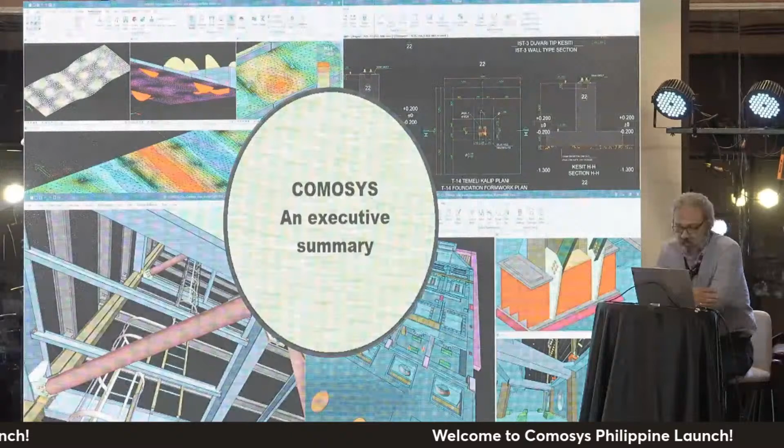So this will be the PowerPoint part where we'll be talking about the executive summary. A brief introduction to the group of companies. You can see a few names out there: Procon, Econ, Proya, Proen, Econut. These are all different companies, but they all belong to the same group of companies. Proya, being in the center, is the software development company which I represent. The others are design and detailing companies, general contracting companies, basically the whole construction industry.

So a little bit of the history. Proya was established in 2001. The finite element module was completed; that was the initial plan. What we wanted to do was basically just develop a finite element module and then link that up with Tekla, create a connection between our finite element module and Tekla. That was the initial plan. Obviously, that went horribly wrong.

In 2007, we developed the steel detailing and shop drawing module. And I would like to share that since 2008, we have stopped using Tekla in-house, because obviously it's our software, we have to use it, we can't develop a software and not use it. But also because the productivity is more; we've learned over the years that we can produce more with the same resources, or produce the same with fewer resources, whichever way you want to look at it.

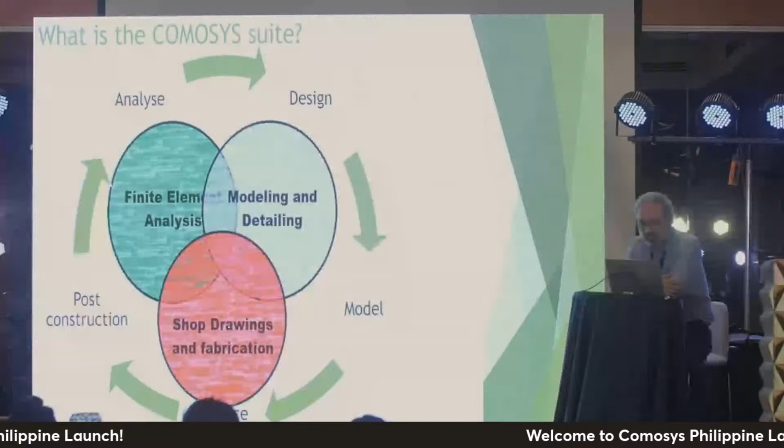Modeling and detailing is also at the heart of the program, as is shop drawing production and fabrication drawings. All three have been put together, which is a unique combination. Normally it's very difficult to get this combination right. Many programs have attempted it, but eventually they've ended up separating the two. There are many reasons, but we feel that we have a good mix, a useful mix.

And the reason I'm saying this is not because it's our software, it's because we also use it. We're not just software sellers, salesmen - we're actually users of the program.

So a few slides. You're familiar with this kind of picture - it will remind you of programs like SAP 2000, right? This kind of picture will remind you of deformed shapes, dynamic analysis, internal forces. This kind of picture will remind you of shell analysis, complicated shells with internal moments and shears and axial forces and stuff like that.

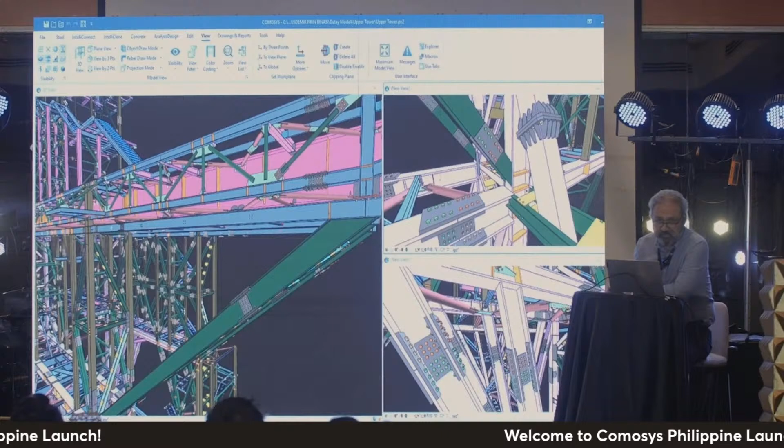So that's familiar to one part of the group. But then there is this - this is a different sector. This is 3D steel detailing, 3D modeling, all the way down to the nuts and the bolts and the cuts and everything there is to it. So this is a whole separate thing.

But in COMOSYS, you will get this all in one package. You won't be moving from one software to another to another to another. If you can do it, it'll be there. If you can't do it, if some feature is missing, obviously we slowly develop more and more features. But the idea is that it's all put together under one umbrella.

You won't be using - and I'll talk about that in a second as well - once you do your analysis, you will be using the same model for 3D modeling. You won't be required to recreate the 3D model.

So more pictures. This will show you some general purpose plate work. And then it's concrete as well - not just limited to steel, it's concrete as well. And not just concrete, but rebar as well.

So just going through the pictures to give you an idea of what kind of software we're looking at here. A few glimpses - I don't want to waste too much time right now, and hopefully get to better parts of the presentation. So that's a glimpse into a drawing produced directly from within COMOSYS.

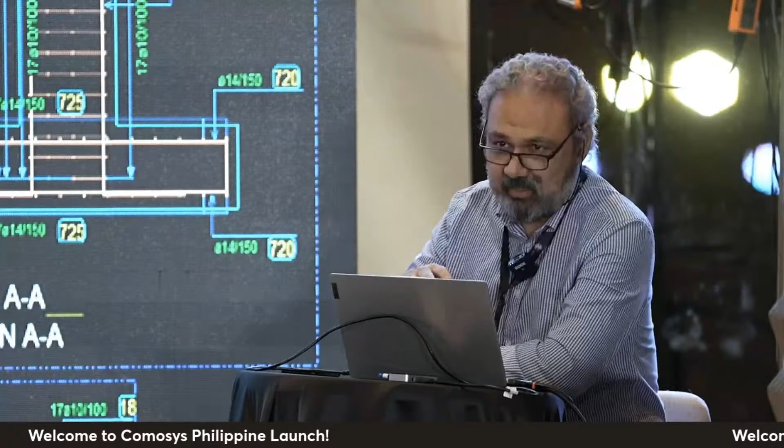You don't need to go to AutoCAD for this, or some other program. All under one umbrella: once you start off, analysis, design, detailing, production of shop drawings, same environment, same program. This is another picture, more familiar to you perhaps since our audience today deals more with steel than concrete, but this is a steel assembly drawing you're seeing on the screen.

I prefer to leave things untouched. I don't try to tweak the drawings so they look good. All automatic drawings can always be made better by hand modification, tweaking, cleanup, which you know much better than me. In fact, I was talking to George and he explained that maybe more than 50% of the time is spent on drawing cleanup and maybe 50% on actual modeling. So being able to get good, clean drawings without or with minimal need of cleanup is extremely important.

It's extremely time saving. So the major core features: it's model based, it's specification driven. You know what model based means. Specification driven means that most things have a specification behind the command. You can change that, you can modify that, and the macros and commands will work according to that specification. So once you set up the specifications, it's like setting up your company and your company styles, and once you've got that, it'll be a smooth ride.

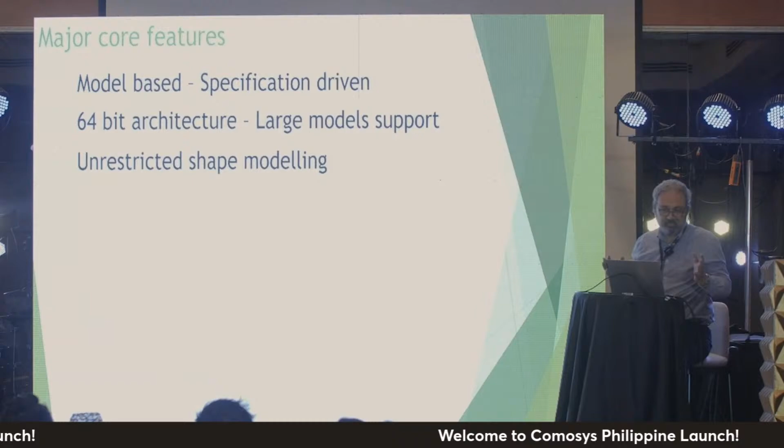Unrestricted shape modeling, we're not restricted to steel frames or anything. You can actually model an aeroplane if you want to. Theoretically, the modeling is pretty general purpose. It's got multi-user support, which means for larger projects, you can have more than one person working on the same model at the same time.

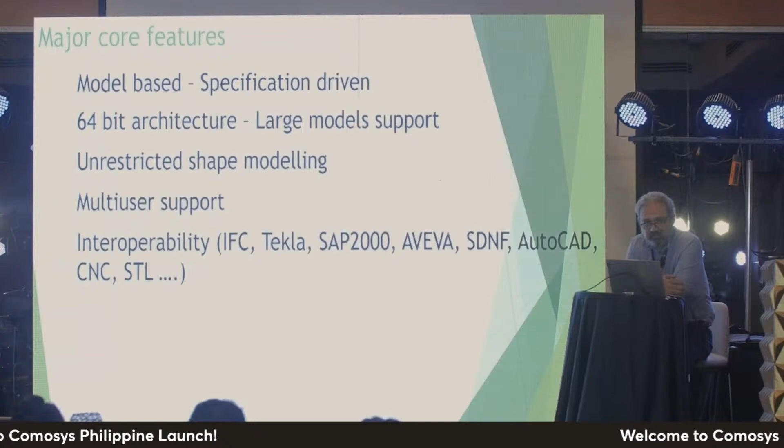It's got lots of interoperability. IFC is the standard, as you know, but knowing that Tekla is the market leader as we speak, we have also developed something like a two-way, bi-directional link from COMOSYS to Tekla and the other way around, in which you don't get just dead objects, but native objects on both sides.

Export to SAP 2000, AVEVA, SDNF, AutoCAD, CNC, the list is long, and it's fully customizable. You can customize the macros, you can customize the defaults of drawings and stuff like that, save them away. And it's also fully programmable, which means that if you have programmers in your team, and they don't need to be very high-end programmers, they can be .NET-based, C#-based programmers, you can develop your own components. You can develop your own entire software if you want, built on top of COMOSYS. So if you are working, for example, in the HVAC industry, and you want to develop an HVAC module, you can do that.

So that's one thing which needs to be mentioned. Now, frequently asked questions: can I do everything I do in other software in COMOSYS as well? The answer is yes. More often than not, I don't want to say always yes. It's never always yes, but 98% of the time, it's yes. So rest assured about that.

Is it faster than other software in modeling? This one I can assure you: once you get your people trained, which I always say is a process of about 2 months, especially for Tekla users who adapt very, very quickly, they will get close to their Tekla modeling speeds in 2 to 2.5 months. In 6 to 12 months they will hopefully have reached the best speeds, which in my personal experience—and we collect statistics on these things a lot—would mean at least double the speed of your existing possibilities.

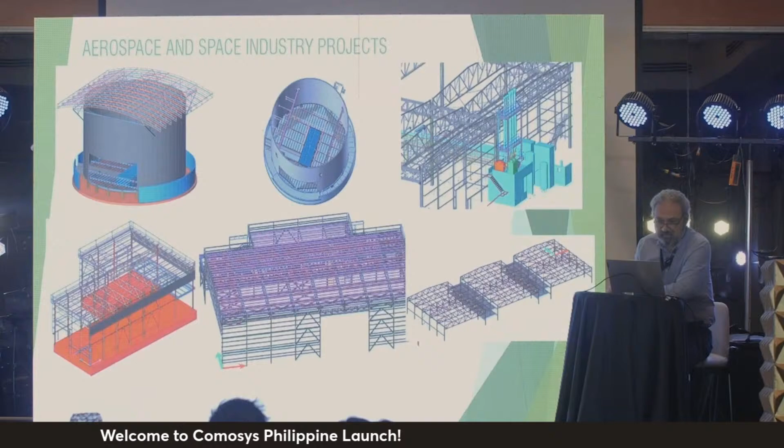Miscellaneous industrial plants, defense industry, aviation projects, aerospace industry, and last but not least, we're so confident that we even built and analyzed our own headquarters. So the Pro headquarters today was also designed entirely by COMOSYS.

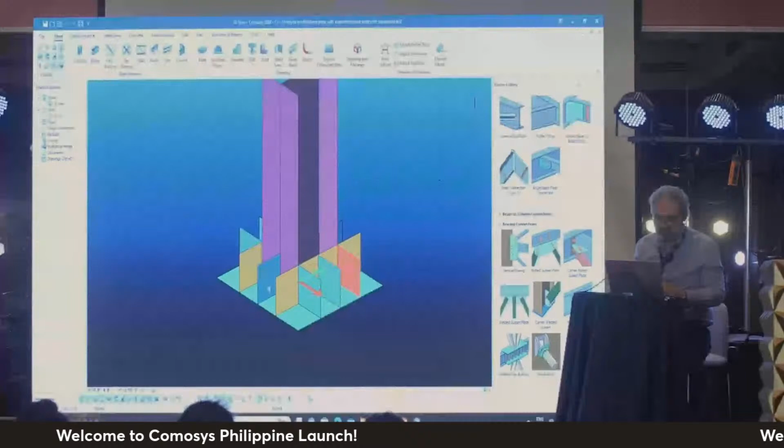Super shells are shells, but super shells, right? You know what shells are, shell analysis - this is a shell, this is a shell, this is a shell. But actually this is not a shell, this is a super shell - a shell which will get meshed automatically.

So think of it like a column and a base plate that you've modeled like that, with some stiffeners and everything. When you go to the analysis and say mesh automatically, you see it immediately meshes it, and it meshes it knowing the connectivity. Can you see the mesh - this plate is aware of this plate, and this plate is aware of that column flange, right?

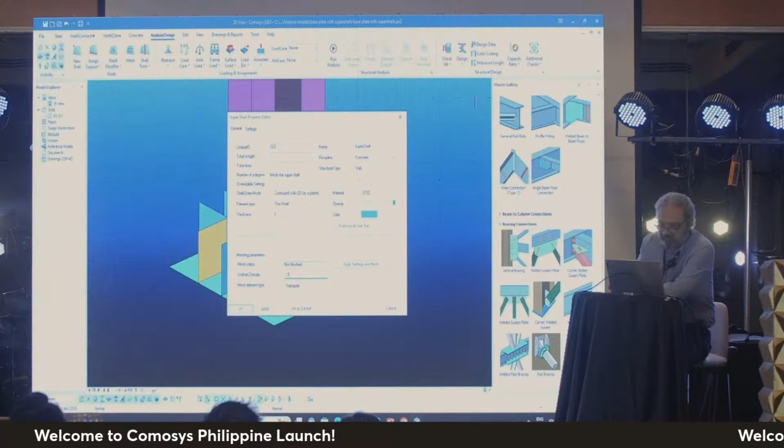So just by the press of a button, you can create these automatic meshes, and you can load them as well. If you look at the mesh parameters - let me remove the mesh - right now it's an average size of 50 millimeters. What if I want a denser mesh for this stiffener? If I click on this and say I want a 10 millimeter mesh for this, and 50 for everything else.

So a 10 millimeter mesh for this plate - but how will it connect with the neighbors? It needs to connect wherever there is contact. If I say mesh it again, just look what happens - the 10 hits the wall and turns the wall into 10 as well. But then slowly as you move away from that contact point, it comes back to 10, back to 50. So automatically you see that it's adaptive.

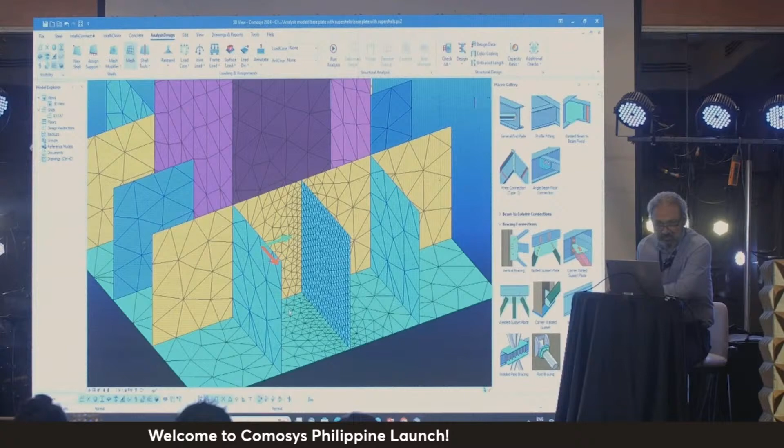I can make a hole here and the mesh will auto-generate. I can add additional plates and make it very complicated. Let me show you a more complicated one - this is like a steel silo bunker with many more plates than the other one, as you can see on the screen.

And it is unmeshed. These plates are big super shells, and they automatically sense their neighbors. They automatically know that something is touching them.

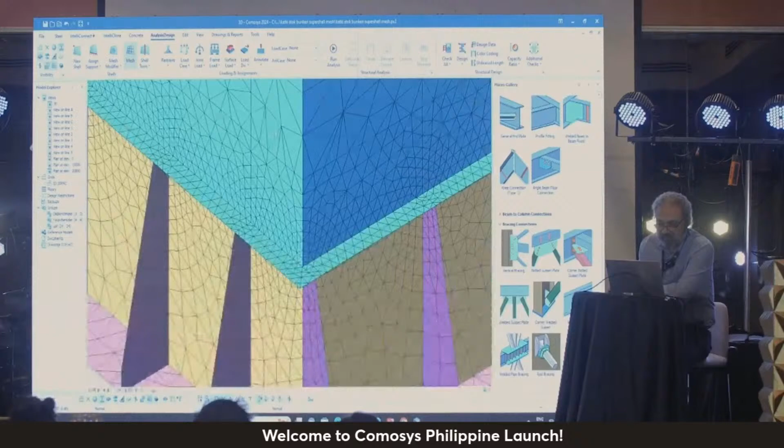So if I were to go to analysis and say go ahead and mesh that, you see how quickly it varies the size of the mesh, and as it touches another plate, there is perfect contact. You can see the exact compatibility of the nodes. People who are into analysis and design will appreciate that more.

But this is extremely useful if you're an analysis and design company. Like I said, there are hundreds of features, so I'll just be skipping over most of them. This is something interesting, the loading, but we won't have time to talk about that. Let's move on to something you will like.

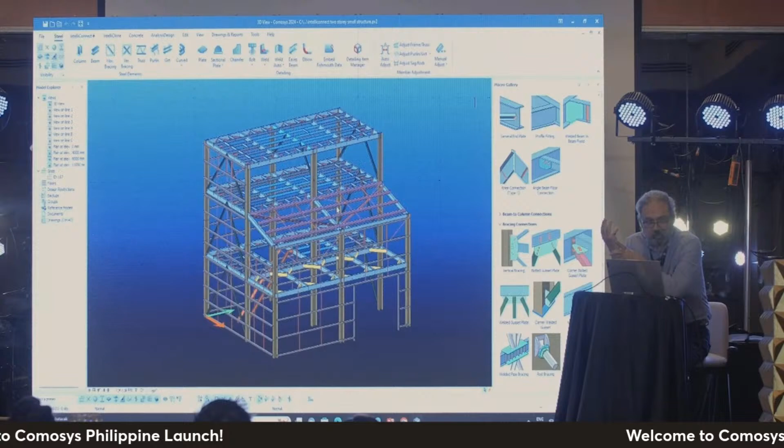It's about detailing now. We have a feature which is not available in any other software, and this feature we call IntelliConnect. The reason I say it's not available elsewhere is because we do have something which sounds similar, which is AutoConnect or rule-based joints in other software.

What do I mean by rule-based joints? I mean that you define the rules, and the program automatically selects from the library whenever it finds that situation and connects for you. That's what a rule-based joint is.

That's what AutoConnect does. But the thing about AutoConnect is that it's a one-by-one connection. One element is connected to another element, one element is connected to another element, and for each one, you define a rule.

For example, you will define a rule saying that when a beam comes from the flange side of the column, use this connection. When a beam comes from the web side of the column, use this connection. When a brace comes from the side of the column, use this connection. But what happens in real life?

What happens in real life is something like this. For example, here we have a complicated situation in which there's a column. There's a beam coming from the flange side—this is a fixed connection. There's a beam coming from the web side—this is a simple connection. And there's also a brace coming into that same point.

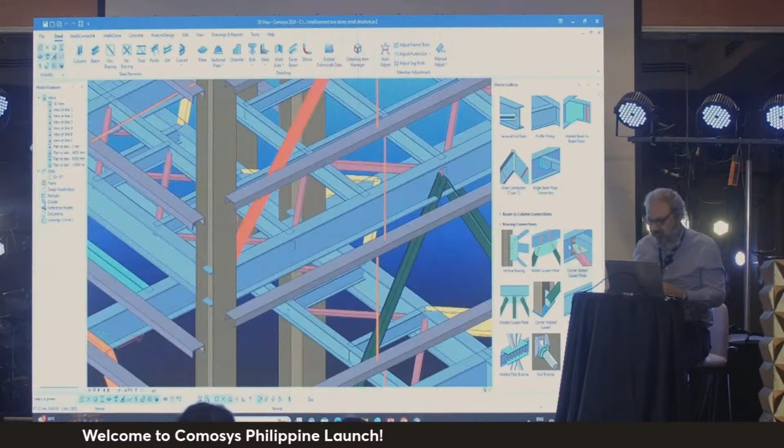Now we might set up our rules saying that whenever you see a beam like that, use the haunch connection. Whenever you see a beam like that, use the stiffened end plate connection. Or whenever a brace comes in, use the bolted gusset connection. But what happens in real life when we do that? I'll show you exactly what happens.

So what happens is the program will come in and connect the haunch—that's the first rule. Then the program will go to your beam-to-beam and beam-to-column connections and say, okay, this one and this one, right-click. Then it will come to your bolted gusset connection and say, okay, this one, right-click. And this is what you get in real life using AutoConnect.

Something you just can't use, because all three connections were unaware of each other. The haunch was unaware of the stiffened end plate connection. The stiffened end plate connection was unaware of the haunch. Both were unaware of the bracing. They were just connecting. So can you use this as it is?

No. You need to either delete it or go inside each of the macros and spend time there. This is what we attempted with IntelliConnect—to find a way to make the program aware of everything happening at that point, everything that can possibly happen there. If the macros can talk to each other, and find solutions where they can squeeze in without clashing, or move around a bit, those are the kinds of things I'm talking about. If we can do that, then maybe not AutoConnect, but IntelliConnect can help us find a solution for this.

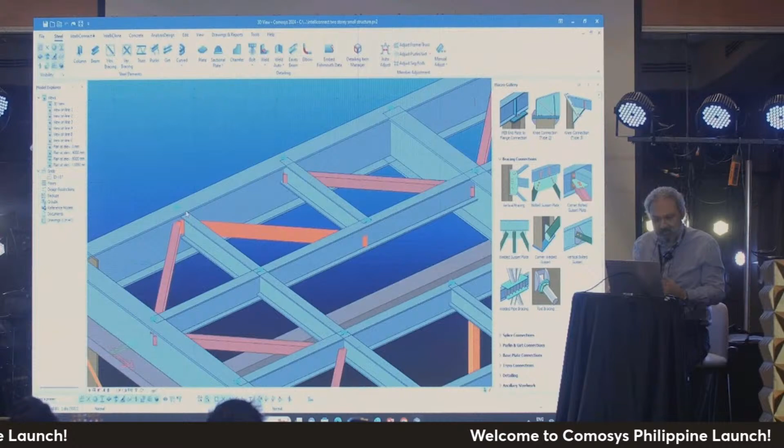But it also does simple things. For example, if I were to just move away - by the way, what is that technology which helps us find the zone? How can we define which elements are involved? For that, we have this special feature called the finite element node, which has all the connectivity information at that point.

This little blue node you see on the screen - if I double click it, you see something called the connectivity of 4. It knows there are 4 elements coming in there: one is the continuous beam, one is the secondary beam, and there's a bracing and another bracing. So it knows the connectivity, and because it knows the connectivity, it also knows what those profiles are and how big a connection will be created. Theoretically, it has the information, and the challenge is to use this information to find a viable solution.

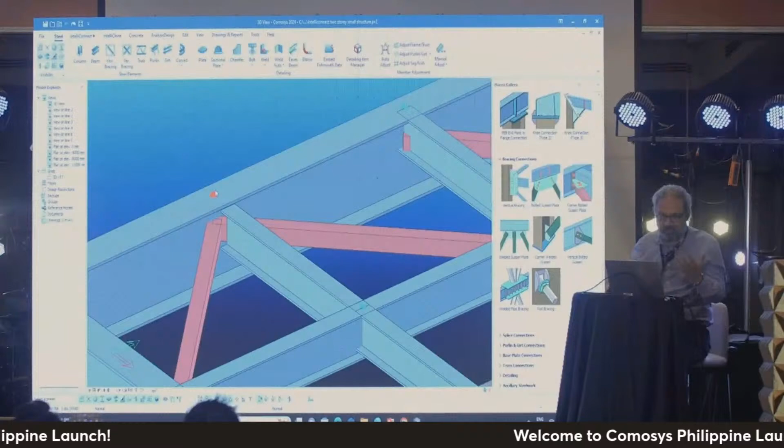So how does it work? It works basically by selecting a node and calling IntelliConnect. You select a node and say, hey IntelliConnect, can you do something about this, given my rules? I have a set of rules in the background, but let me do the simple cases for you first.

I'm going to select the whole building, and I've also selected the nodes - those little blue nodes you just saw. I've selected everything basically, I don't need to just select the nodes, I can select everything. I right click, go to my IntelliConnect menu, and say create the girt connections.

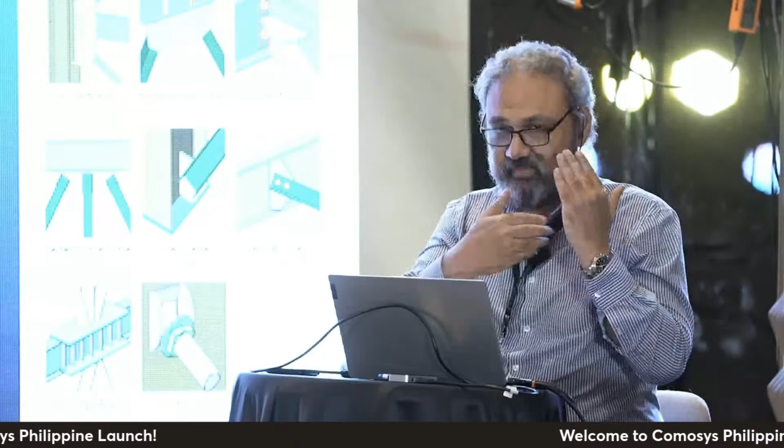Now just imagine what I'm saying over here: go through this entire model, find the girts. If they're one-sided, find them. If they're two-sided from both sides of the column - the column can have 2 girts coming in, or they can have a single girt - find them all, wherever they are situated.

I say click create girt connections, and it says okay, I can give you these 4 options. What kind of a girt connection do you want? I go with the bracket type without cut - I happen to like it, you can like something else. We'll talk more about adding more options to this. So let's just say bracket type, this is the girt connection I want.

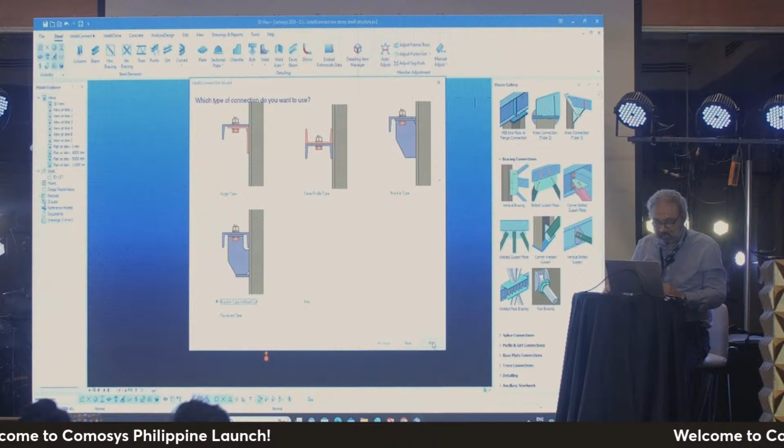Don't forget, I've selected the entire building, and I'm saying just create the girt connections, and I'm going to press run. Now it's looking through the nodes, finding the connectivities, finding the beam groups, and trying to classify where the girts are. Whenever you see 'done' over here, it means it was able to connect. If it's unable to connect, it'll say could not be connected.

And then you can go there and do it yourself manually. But what has it done? Let me close this and zoom in. So it has connected this girt - it's found the girt and connected it.

What about the double-sided ones? It's found the double-sided ones and connected them as a double-sided connection, not as two separate connections - not one connection for this and one for the other. It's a common connection. It's found the ones at the edges, found them all, just by selecting the nodes. It's classified them into one-sided connections, two-sided connections, and gone ahead and done the detailing.

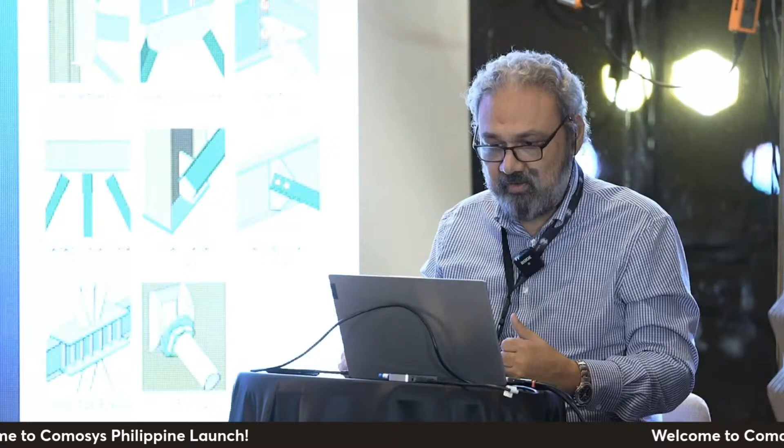What if I selected the whole thing again, right-clicked, and said IntelliConnect, create purlin connections? It gives me certain options - do you want the angle type, for example, or the folded plate type? Let's go with the angle type, and I want to reverse the cleat so it's on the other side.

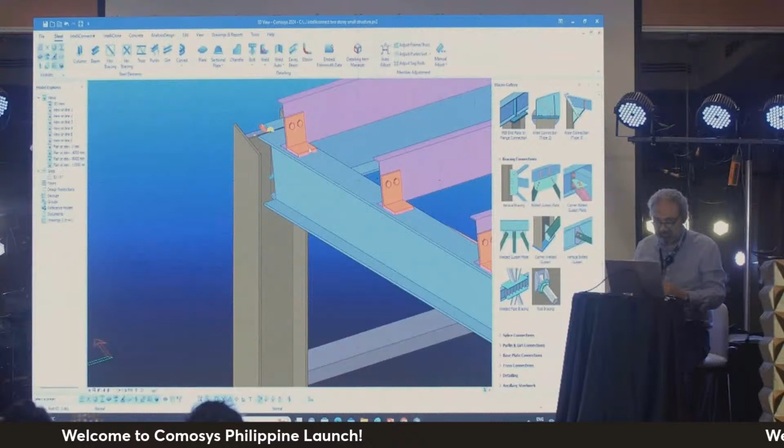I just say okay, please find all - I've selected the entire building - just go and find all the connections where purlins are doable. It gives me a report at the end, I can close that, and my purlins are connected. Just imagine what I'm doing over here - these are the easier cases.

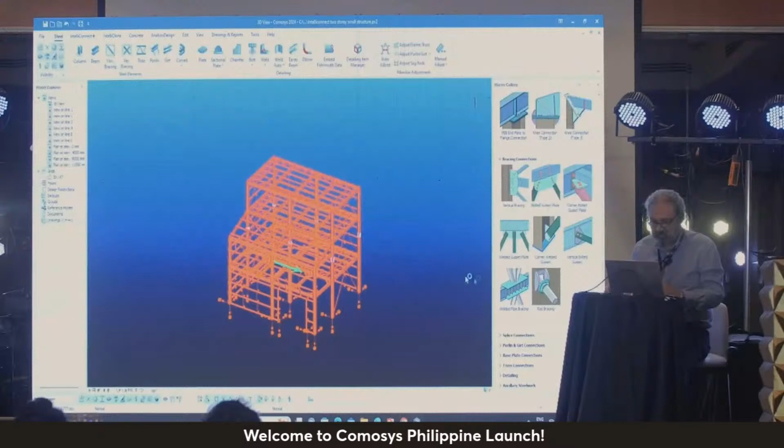I'll get to the harder cases in a minute, but imagine the power which it can bring to you. Let me select everything, right-click, IntelliConnect, and say create the splice connections. Now, splice connections have to be between elements which are parallel to each other - this is not a splice connection, this is a splice connection. When I do that, it goes inside and finds 6 places where there were splices in the model.

And very conveniently, it goes through the entire model. Now, it looks a bit like magic, but it's actually not magic, obviously. There's a lot of programming involved in this. There's a lot of intelligence involved in this.

What about these sag rods? These sag rods need little holes over here for the sag rod to go through, right? Over here, over here, over here. All these need to be connected. What if I just right-clicked and said IntelliConnect, create my sag rod connections? It'll find the sag rods. It'll find the girts which are connected to them. It won't make a mistake in finding the wrong element. Let me just go ahead.

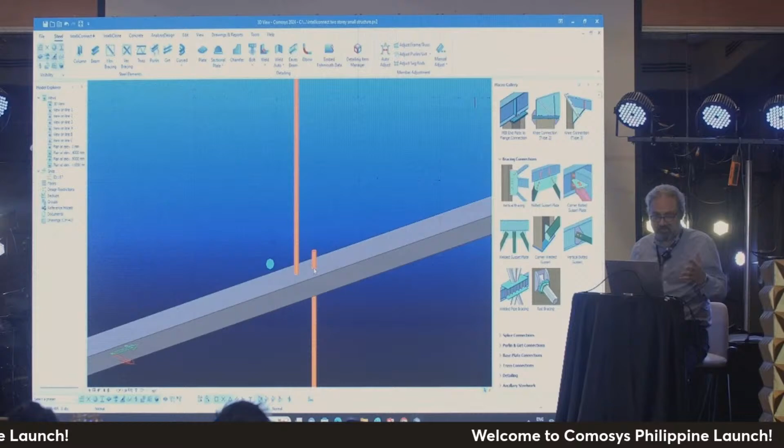Okay, so it's mostly done. And if I zoom in now, can you see the little holes? These weren't there a moment ago. But what it did was, it just went through the entire structure, found the sag rods, found the girts, found the connection points, and did my connection.

Now, up till now, these are comparatively a lot easier. I'll talk about two more cases which are much more difficult to solve. And those cases I'll call the difficult cases. There are many more cases actually, but I don't want to spend too much time on this, just to give you an idea.

These are the floor beams and the beam column, the one I did in the beginning, the column, the beam, this beam, and this horrible mess which we saw over there. I'll do examples of both.

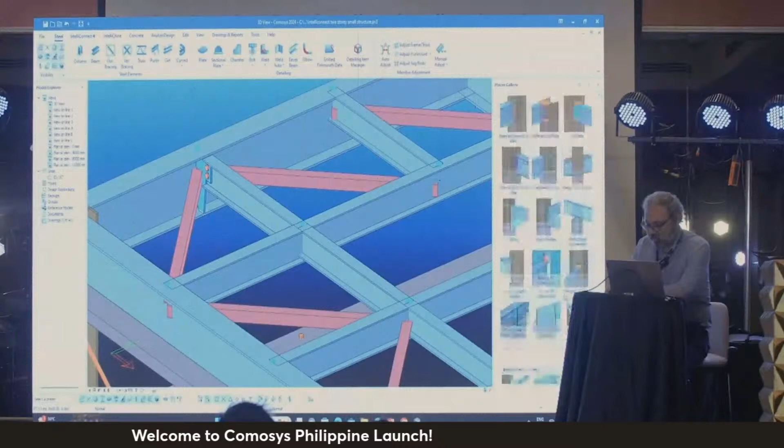So coming to the floor beams, if I have a situation, I'll do it manually for you. Let's say I want to use the fin plate connection over here, and then I want to use the corner bolted gusset connection. So this one and this one with this one, and then this and this and this. I've made a nice connection with the beam connected with the fin plate, and the horizontal braces connected with the corner bolted gusset connection. This is a very common way of connecting, especially when you don't have too big loads.

But what if, let me undo this, what if my requirement was to use the stiffened end plate connection? Now it's impossible to make a connection over there for the bracing, because it's already clashing, as you can see. Now, in actual practice, what do we do? We shift the horizontal braces a bit to the left or a bit to the right. That's what we do—5 centimeters up to 10 centimeters sometimes, depending on the situation.

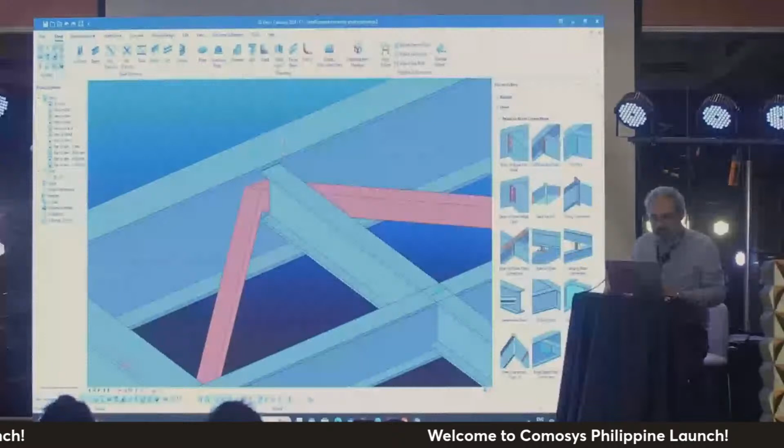Now, that's a complicated decision, which needs to be taken. Let me undo that. So what I'll do is, let me go to my IntelliConnect menu, press Shift, open up some of the settings, and go to my beam-to-beam bracing connections. Let me first beam-to-beam bracing.

Okay, that's fine. I don't want to use the fin plate. I want to use the stiffened end plate connection, the one I just used. And for the other one, I want to use the bolted gusset connection or the corner, whichever one works. But I know that they're not going to work. They cannot work unless I shift my bracing. I know that from experience, right? So these are my parameters.

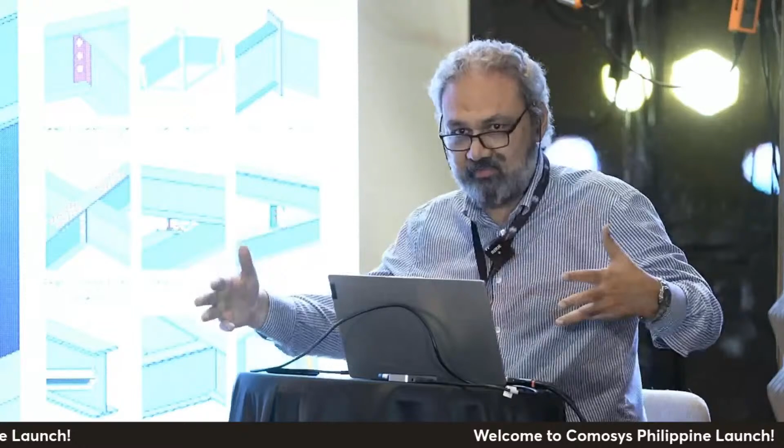But what I will do now is, I will select—now please focus on the screen—I will select this node. If you remember, I said everything works by selecting the node. And the node knows the connectivity, and then it knows what to do from there. So with my settings that I want a stiffened end plate connection, and I want a bolted gusset connection, can it find a solution? Please look at the screen, and you will see, hopefully, something nice happening.

Did you see that? Is that interesting?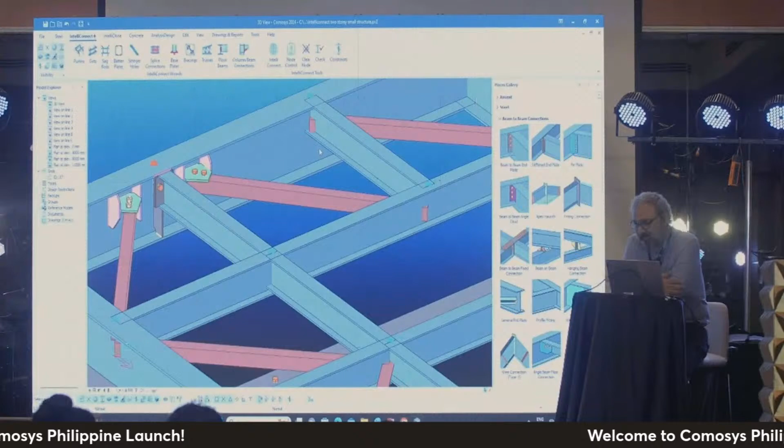Well, actually, it's very interesting, because these are the time-consuming things. These are the things which take hours and hours, especially for young detailers, especially for detailers who are not very experienced in steel detailing. They will look at this for hours and think about what do I do now, right? So having the ability to find this kind of intelligent solution for places like this is extremely time saving.

Now I did this for one joint. What I could have done is, obviously it's going to take some time, so I'm not going to do it right now.

But what I could have done is I could have selected the entire floor and said, make me only the beam to beam connections with the bracing using these parameters, right? And maybe it's going to take 1 minute or maybe 2 minutes, but the alternative is maybe half a day, right? So when it works, it doesn't always work.

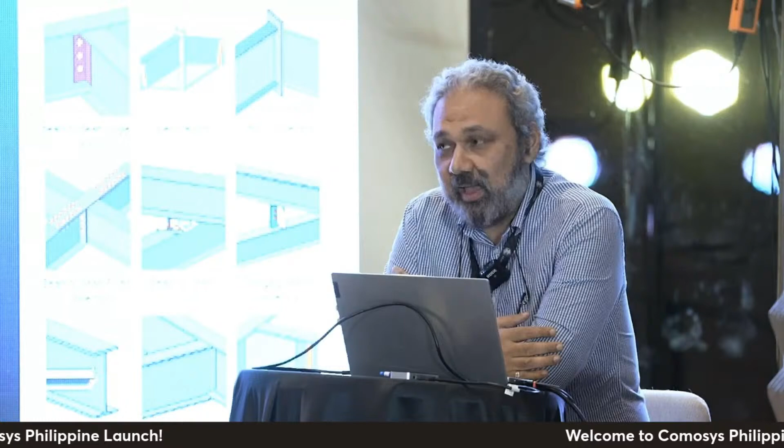IntelliConnect doesn't always, it's not magic, but it works in a lot of very commonly occurring situations. And when it works, it's going to be the difference between 2 minutes and half a day. And that's a huge difference. That's the difference between doing something in 2 months and 2 days, something like that, when it works. When it doesn't work, I've got something else to show you as well later on.

What about situations like this? A beam, a column, another beam coming from the flange side, a vertical brace, the one I did in the beginning, the mess I created, right? So let me press Alt-D and see.

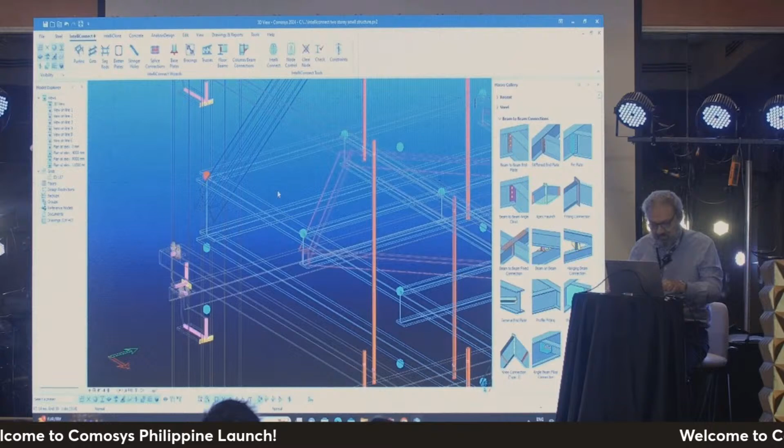Yeah, this is the one, the node with the connectivity of 4. I've selected it. Let me go back to my IntelliConnect settings and go back over there. Let me remove this, and I'm going to connect my beam to column bracing connections. Yeah, beam column, this is the category. Obviously this requires some explanation. I'm just going to go through it quickly at this point.

Beam to column bracing. And let me go to the settings over there and say that I want my haunch for the flange side of the column. I want to use the haunch connection. I've got other options as well. For the web side, I want to use the stiffened end plate connection, exactly what I did. And for the brace, I wanted to use the gusset plate macros. I'll select that, okay.

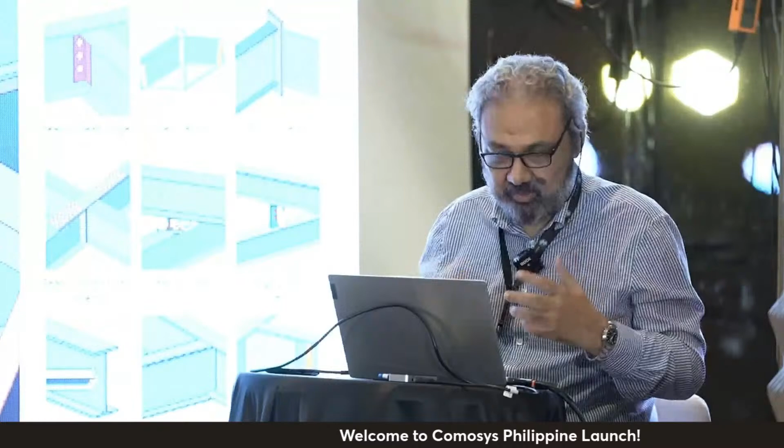And now look at the screen again. Look at this point over here. It's going to make 1, 2, 3 connections. But these 3 connections need to be aware of each other. So I'm going to just go and press IntelliConnect. So I asked it to use that node, use that information, and find a solution.

What it did was, it created the haunch connection, but it knows that the haunch has created these stiffeners over here. And these stiffeners are going to be a problem from the other side for the beam connection, right? So it used the existing stiffeners of the haunch and converted them into these kinds of stiffeners, pushed out, right? And it made a very nice connection for the beam to column from the web side. And then it used the same stiffener as a corner element for the vertical bracing. Can you see that? Right?

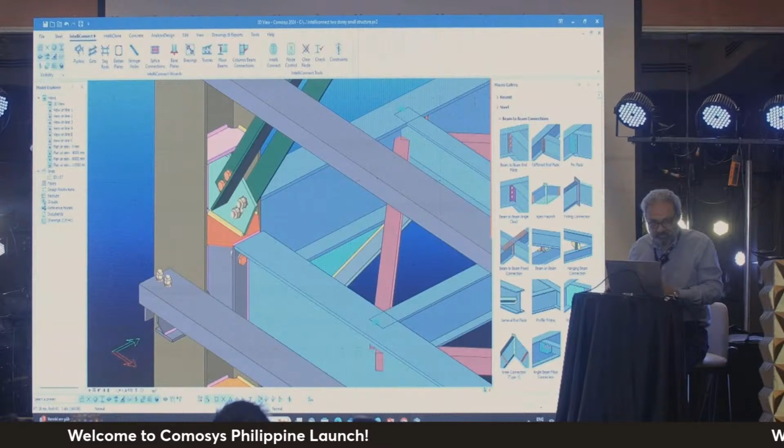So this is, in summary, what IntelliConnect does. You give it a node, it finds the connectivity, it searches for the options, right? And then it tries to find a solution.

And most of the time, you will like that solution, because these macros at the moment, for example, you might say, okay, why has it put just 1 bolt? It could be a question in your mind. And the answer is, the moment you set up according to your company standards, that with this beam you need this connection, with this beam you need this presets, the moment you do that, IntelliConnect starts following your company presets. Okay, so your company presets are set, the node has the information, you just ask it to go and make the connection. Correct?

I'll stop here because I have a lot more to say. So I'm here for another 5 hours. Sorry.

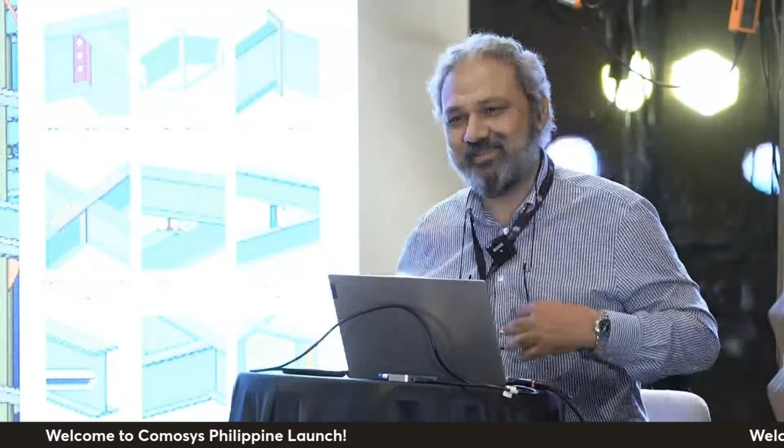Now, IntelliConnect is very powerful, but IntelliConnect is also limited. And why is it limited? Because it offers you certain options, right?

If you remember what I did was, I just selected something like this, and I right-clicked, and I said, IntelliConnect, Purlin connections, and it gave me these 5 options. What if you don't want these 5 options? What if you want a 6th option, a 7th option, a 21st option? What if you want to do something stupid? What if you really want to enjoy yourself that day, right?

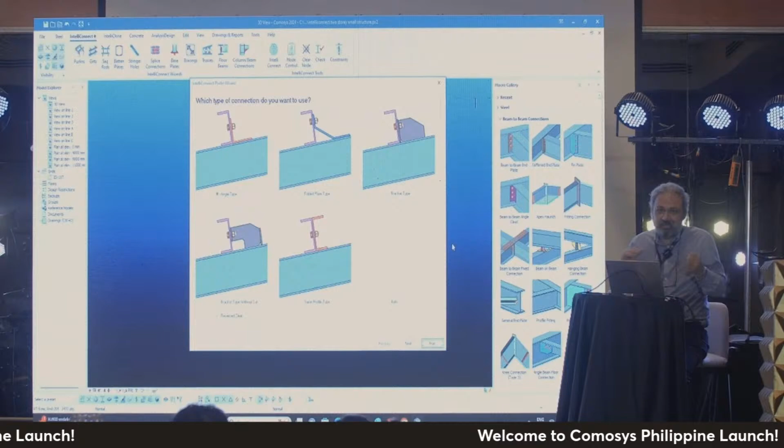So IntelliConnect, while being extremely powerful, is also kind of shackling in a way that it limits you in a box. It says, okay, these are the options I can help you with. If you want to stay within those options, amazing tool. It can reduce a day's work into 4 minutes, 5 minutes. If not, then you just can't use it. There's no halfway. Well, there is a halfway, but it's not really that much fun. But there's another tool which we have developed, which is extremely powerful and slightly slower than IntelliConnect.

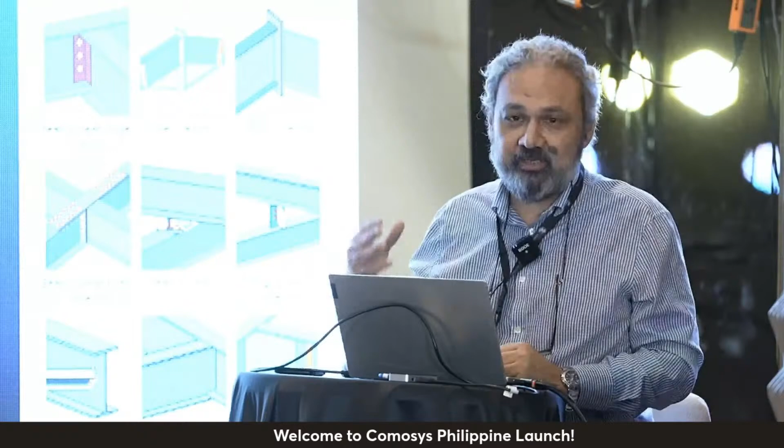Slightly slower, but much more general. So you don't reduce a day's work to 4 minutes, you maybe reduce a day's work to 1 hour. But there's no limitation on what you can do, no 6 macros to choose from, 3 macros to choose from. Do what the idea over there is.

Remember, I selected a node and then I said connect. In that case, the name, by the way, is IntelliClone. IntelliClone is the technology I'm going to be talking about. And the idea is that you provide the solution for one node, but exactly the solution you want in your project. Whatever it is, modeling is unlimited, as you've already seen.

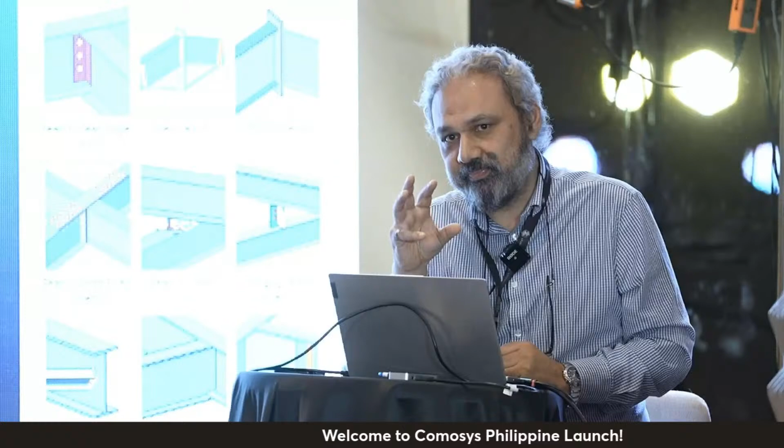You can do anything you want. You can create cuts and bolts and welds, and just play around. Do whatever you want with that node. And when you are done with that, COMOSYS will then find similar nodes everywhere and apply your solution to those nodes. I'll try to show that, and I'm sure you will like it.

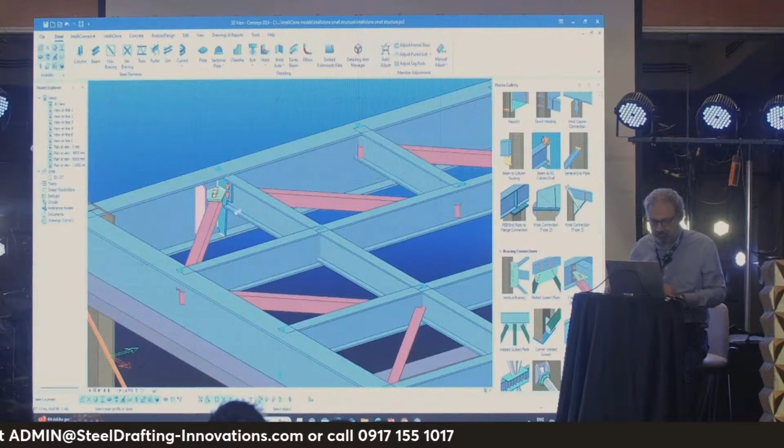So imagine this. Let me zoom in there. Now, just bear with me. Let's say I want to do this. Let's say I want to create the fin plate connection over here, and then I want to create the corner bolted. This is what I just did a while ago. This is what I want to do. This is my solution, this is my solution.

It can, like I said, right now it's based on macros. Right now, IntelliConnect can also do this, but imagine if this was something IntelliConnect couldn't do. Just imagine that case in which this is outside the scope of IntelliConnect. It's something general. Now I've used 3 macros over there.

Now just watch me. Select any, if the macros are not exploded, you can explode the macros as well. With IntelliClone, there is no limitation. You can explode the macros, you can move stuff around, you can add more cuts, you can add more extra welds, you can make a new chamfer, you can do all that. But we'll do that slowly maybe. But all I need to do is, if the macros are not exploded, I'll select just one element from every macro.

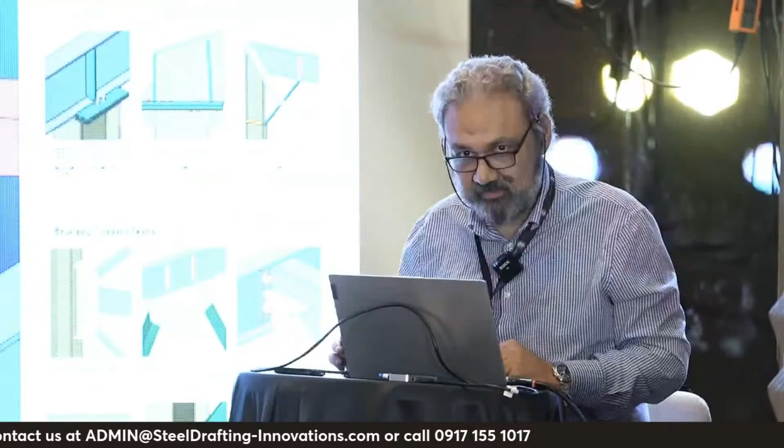So I've selected 3 plates, one from each macro. One from the fin plate, one from the bracing, and the other one from the bracing. And also, I select the node. Always remember, the node is the key. The node is what knows what's happening around this area.

So what did I do? I select the node, I always select the node. That's for sure. And after the node, I select one element, any element. Could have been the bolt, the weld, the plate, anything, a cut even. One element from each macro I've used over there. And now watch the screen.

I go to my IntelliClone menu and I say clone all. I'm going through a lot of steps quite fast, but when I do clone all, it does something. It does something which is called joint numbering. And this is a unique feature of COMOSYS.

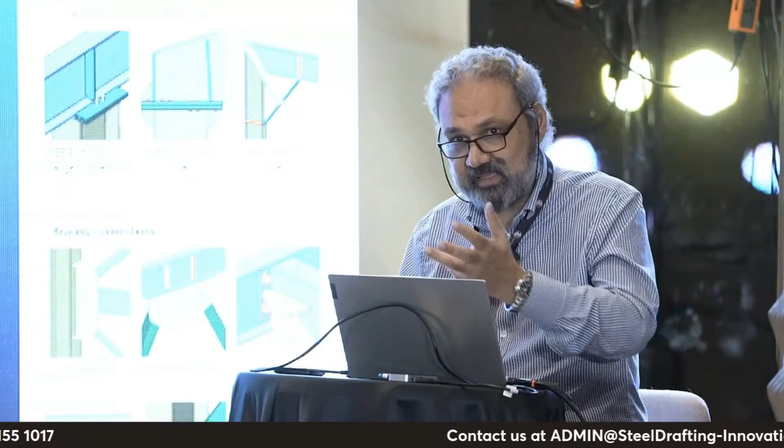Joint numbering goes through the entire building, finds all the nodes, and then numbers them. Like we have numbering, like this beam is the same as that beam, that kind of numbering. But this is joint numbering. This is different. This means this joint is potentially the same as that joint. So in this joint, the main member is IPE 300, the secondary is IPE 140, and you've got two bracings of angles 60 by 6.

It's looking for the building for this exact combination, coming from the exact angles. So even if the angles are different somewhere, it's not going to group them together. The situation needs to be the same. Now, what did it say? It says there are 19 unconnected joints. So it went through the entire building and it said, okay, I found 19 others like yours. It's found 19 other joints.

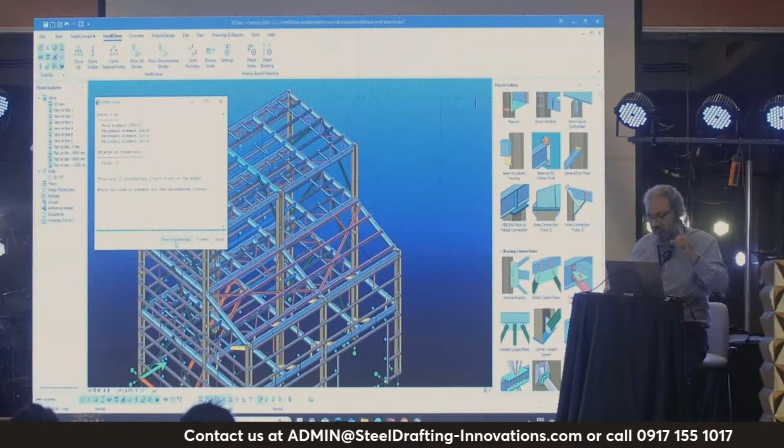So I press this button, show the unconnected ones. I've connected one. I'm asking the program to show me the unconnected ones. Now when I do that, just see what happens. I'm going to pull this aside. It's going to filter the building into only those areas which are similar to my source.

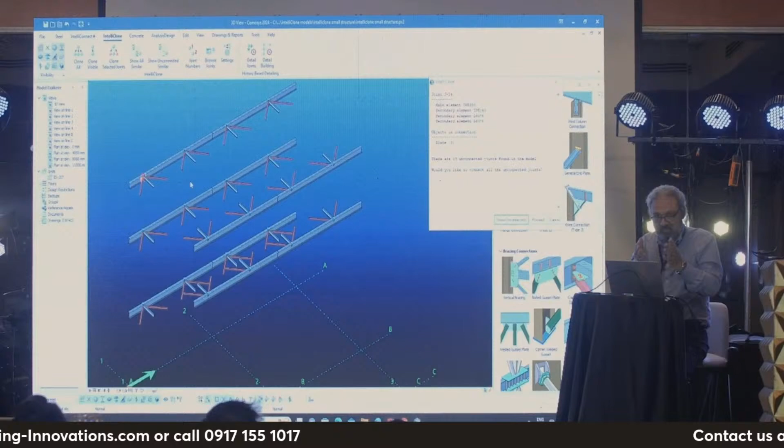Can you see that? Only where the main profile is the same, the secondary profile is the same, the braces are the same, and the angles of the braces are the same, or at least within certain limits. Maybe there's a plus minus 5-degree difference, and you can tell the program to include those as well. Now once it shows me, all I need to do is say proceed, because I'm happy with this selection. If I say proceed, just see what happens on the screen.

That's it. Everywhere in the building, my solution has been applied.

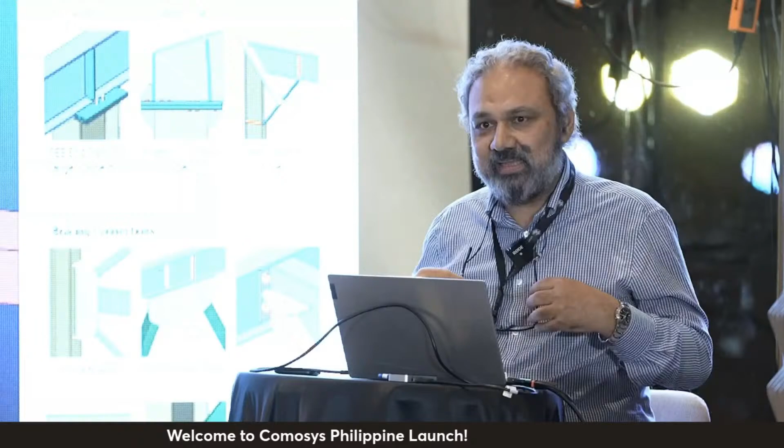Now, I want you to imagine how useful this can be, because now you're not limited to certain macros or templates, if you will. Basically, you decide, and I'm going to do a few more examples of that. So just see how quickly I've gone through these 19 connections by making one connection. This has reduced my work 19 times maybe, right?

Let me right click and say show all, and the entire building is visible. Now let me do something else. Let me go down here and zoom in there.

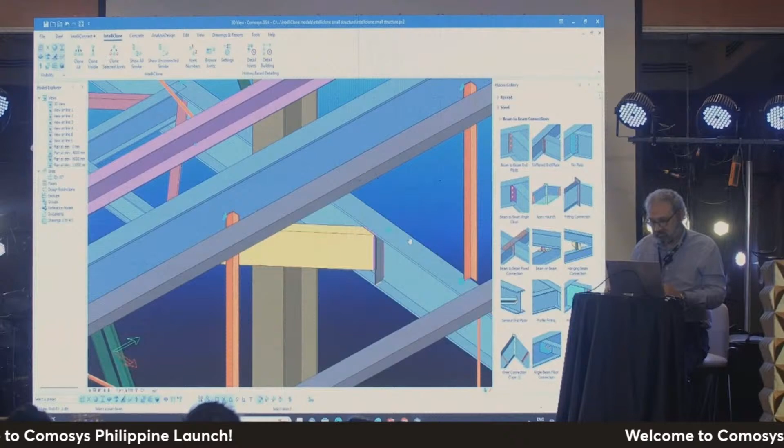There's a beam coming in, there's a channel coming in like that into a main beam, and my client says I want to connect this with the stiffened end plate connection. This is what I want to do. A stiffened end plate connection. Can you see it? It's coming in at 45 degrees angle. Okay, what do I need to do?

You tell me. I need to select any element created by the macro and select the node. Then move out and go to my clone all. That's all I need to do.

And what it says is there are 11 more cases in the model. Can you show them to me? And it shows them to me. These are where it has found the exact same thing in the model. However complicated the model could have been, it'll find those for you. Okay, I'm okay with that, I'll just say proceed. And that's it.

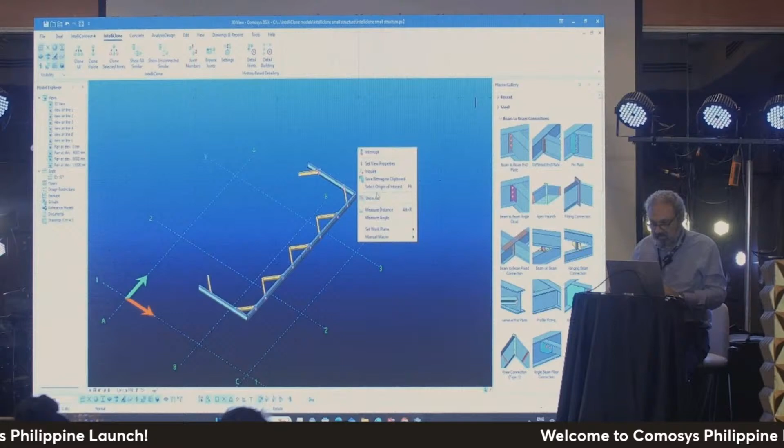My connections have been made. Now I'll show you the ones which are not made. So what about the other side? This one is connected over here. Why is this one not connected? Because there's two elements connecting over there, it's not the same situation. Why is this one not connected? Because it's got one coming in from this side and one from the other side, and two braces as well, or one brace.

So let me do this. Let me select like that, say show only, do that, and make my stiffened end plate connection. Then let me make my fin plate connection. And then let me go in and make my corner welded gusset connection.

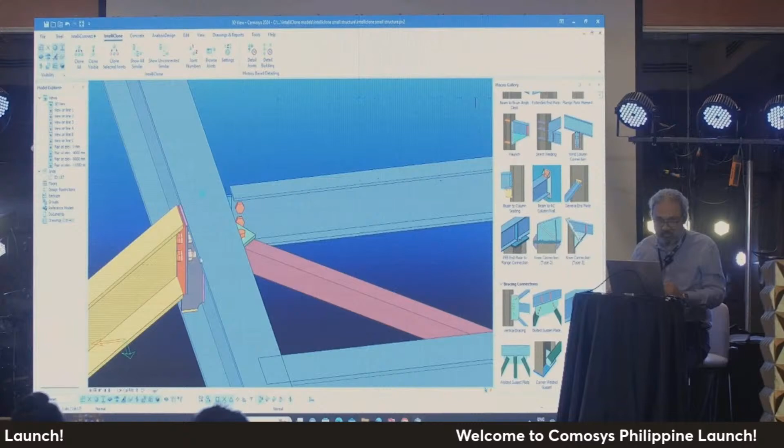Okay, so I've made a complete solution over here. I've connected this one with the stiffened end plate, the other one with the fin plate, and this one with that. Now what do I do? I select one element from each macro. I'm going to select this one and this one and this one, and I'll never forget to select the node. Okay, let me show the whole building. Go to my wonderful command over here, say clone all, and it says there are 3 more cases like this in the model somewhere.

So I wanted to show them. You can see it's found the cases which are similar, exact same orientations. And now all I need to say is proceed with the cloning, and the cloning is complete.

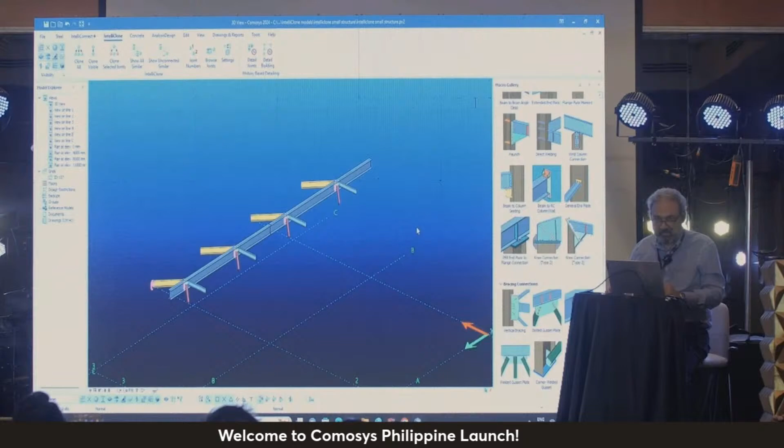Now imagine going through your structure like this. You start in the morning, and one by one, it's going to flag those nodes. In one go, you will actually connect 20 nodes, then 20 more. So instead of moving one node at a time, you're jumping 20 nodes at a time.

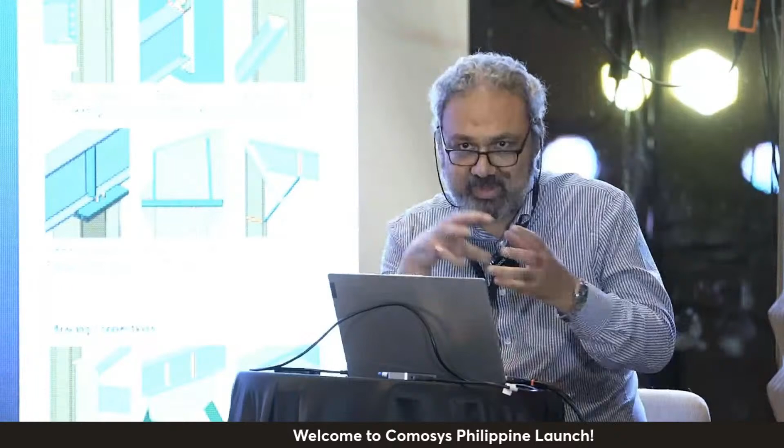So for example, this one, let me show all. Let me see how many nodes we have in this building. So we have 501 nodes in this building. Normally you would connect things 501 times — go connect, go to the next one, connect, go to the next one, connect. With IntelliClone, you will divide 501 by roughly 20, so maybe something like 25, and you will go through 25 steps rather than 501 steps. I just want you to imagine the power that can give your detailing team.

Now let me show you something even more interesting. Let's say over here we have a problem, and the client wants us to use the stiffened end plate connection. Whenever we use the stiffened end plate connection, we have a huge problem with the braces because they just don't connect. So I go to my... I know I need to shift. Now with IntelliConnect, the shifting was not completely in your hands, it was to a certain extent. You can have parameters like move by 1 centimeter at a time, and then never cross 10 centimeters or whatever — you have certain controls, but over here you have full control.

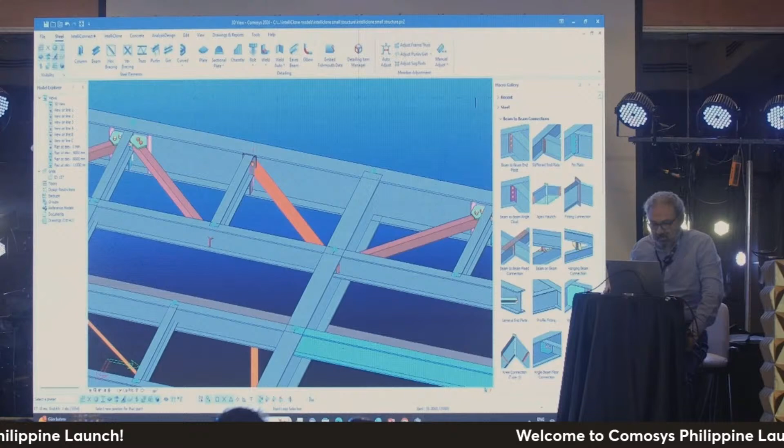So let me do something. Let me select this and adjust the frame manually. Go from here, and let me see — this is the Y direction. So let me say DY, say 110 millimeters. I want the exact amount I want it to be shifted. Okay.

Now this is under my control, not in the control of IntelliConnect. I decide as the detailer what I want to do. So instead of the corner welded connection, I go to my bolted connection and create a connection like that.

I don't like it, it's still clashing. So I go inside and make some changes. The first change is I don't like this, the left stiffener, so I remove the pink stiffener on the left. And the second thing I do is...

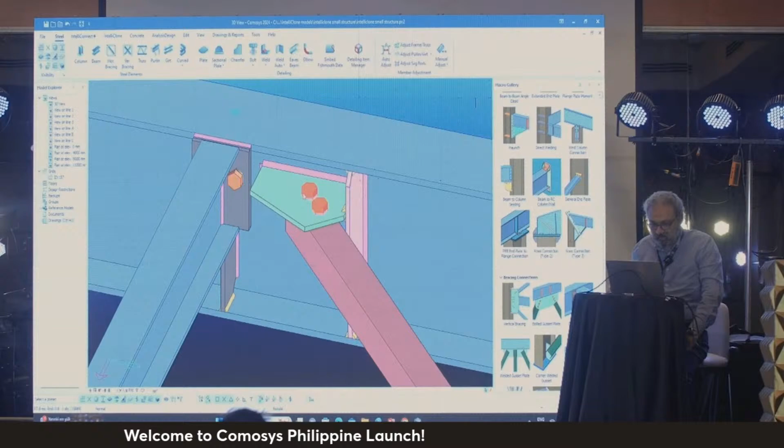I reduce this one to 50 millimeters. So I've limited the gusset plate, right? It was longer. Is it clashing? It's still clashing, so I don't like it. It's almost clashing, maybe I can increase it to 65 or something. Oh sorry, I need to reduce it actually, to something like 35, right?

So okay, now this works for me, right? I've shifted it to my liking. I've made modifications inside the macro.

Now note one thing, let's go through it. What do I do? I select this one, and I select the node. We've learned that, right? Now I'll show you something. Let me go to my IntelliClone menu, say clone all, and it says there are 19 more occurrences, right?

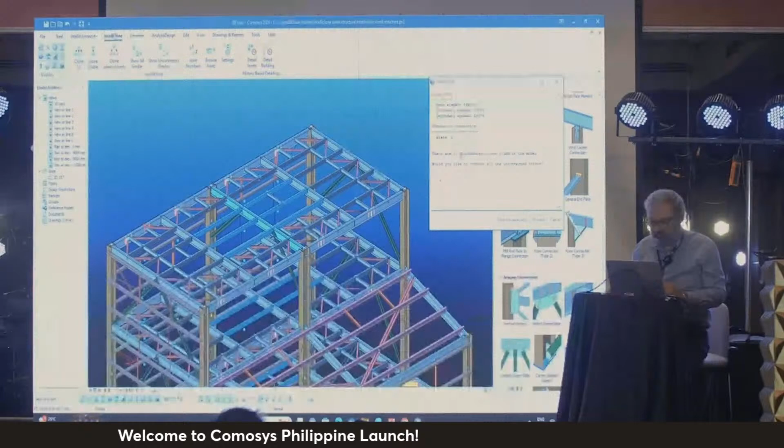So I show the unconnecteds. Now this is interesting, this one has been shifted by me, you just saw me shifting it. But these ones are not shifted, these ones are still where they were, right?

So I have created a shifted solution at the source. It still found the targets because those are potential targets. They're not exactly the same as the source right now because the source has been shifted. But it knows that although it has been shifted, I can still do something at the target to make it...

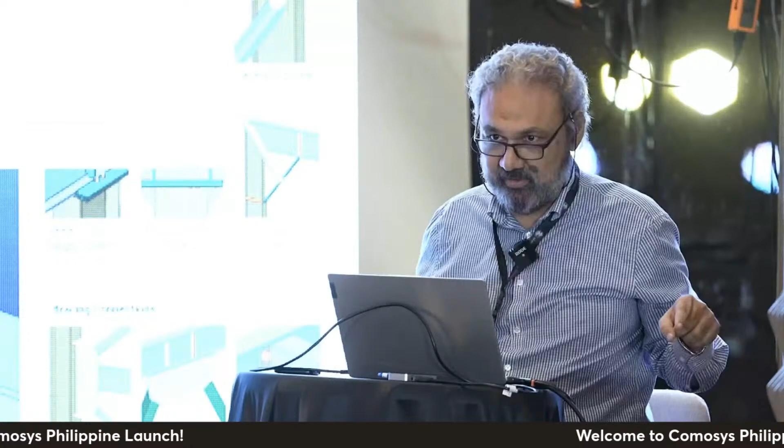look like the source, okay? And that's very important. So in the previous examples, the source and the targets were exactly the same. In this example, the source and the target are different and yet the same, right? So there are 19 occurrences of that particular combo I've created, and I'm going to say proceed.

Now when I do that, just look what happens. They've all been shifted. This one has been shifted, this one has been shifted.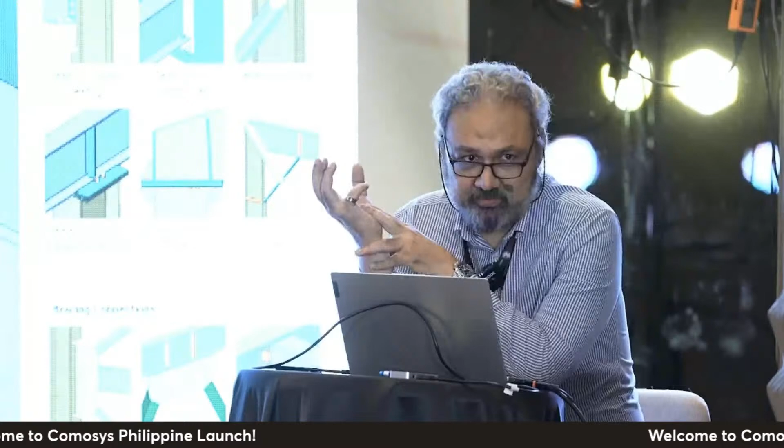This, if you appreciate it, can dramatically reduce your time. If you know how to use it, if you know how to make the best use of it, in the best cases you will reduce your time by 20, 30 times sometimes. In the worst cases, a couple of times, right?

But it's very beautiful, because you can go through your... and I'm not showing you some of the very nice stuff as well, in which you might be thinking, okay now I've created some things, how do I know where to go now? You might be asking this question. As I finish the project, less and less remains unconnected, and it's harder and harder to find the unconnected ones because most of it has been connected, right?

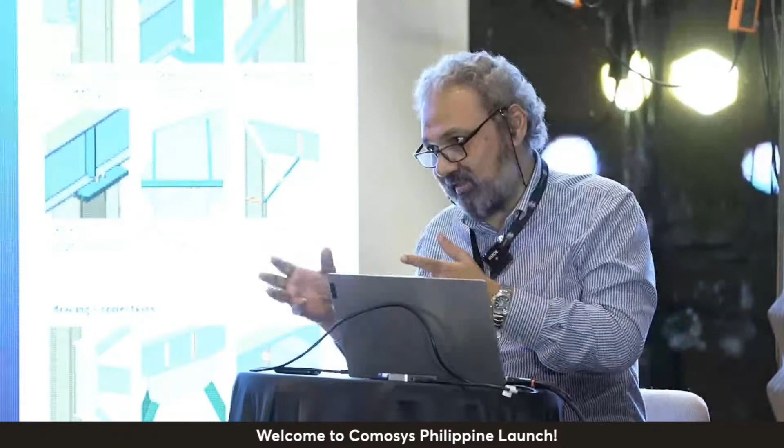So there is a way. It actually takes you directly to the unconnected ones. It will list all the macros, all the joints for you. It'll show you which ones you've finished, and then it'll show you the ones which are still remaining, and then you can go to the next one, find a solution manually. That's the whole idea of IntelliClone. You find the solution.

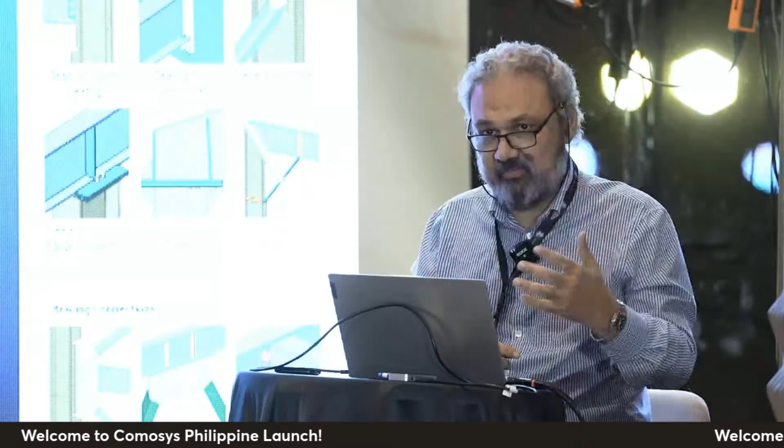IntelliConnect finds the solution. You either like it or you don't. You play around with the parameters, maybe you like it, that's fine. And like I said, in many commonly occurring cases, you do like it. But let's say you don't like it, or the client wants something very specific. What do you do? You go to IntelliClone, you do exactly what the client wants in one place, and then you say clone this, find all the places where this occurs.

And that's real. Now I'm going to do one final example because that's even more interesting. So let's do a stiffened end plate over here. I've created a plate like that, a stiffened end plate connection. But the client wants something strange. The client wants that whenever you make a stiffened end plate connection, please also make a little cut on the...

secondary beam, for whatever reason. I'm not going to go into why the client wants that, but the client wants that.

Whenever it says you make a stiffened end plate connection, you also create a hole, for example, in the web of the secondary - that's what the client wants. But you cannot create that hole with the stiffened end plate macro. You can model it yourself though. So let me see what I can do here.

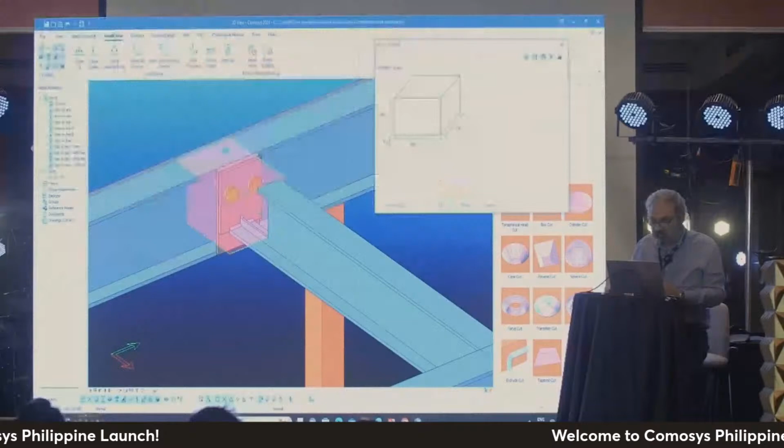If I go to my parametric objects, let me go to my parametric cuts and do a box cut here. I'm not very familiar with these things, but let me just roughly place it somewhere over there. By the way, some of these cuts are parametric - you can actually modify them parametrically after you've created them. So let me select that and move it in the X direction, say 50.

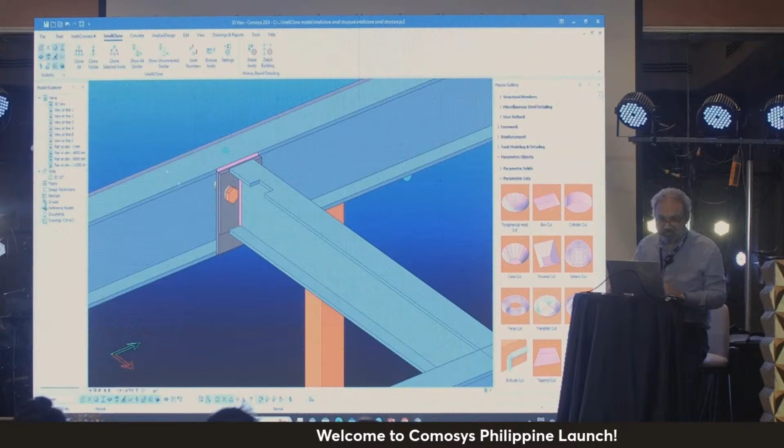Let's say this is what the client wants - okay, I'm not the client, sorry, but this is what he wants. He wants you, whenever he wants you to make a stiffened end plate connection, to also cut the secondary beam like that, because of whatever reason. That's not the point. So what do you do?

I select any element of the macro, I select my node, but I also select any manually created objects - okay, anything which has been manually created. It could be a cut, it could be another bolt. Maybe he wants an extra bolt at the bottom, which the macro cannot do. So anything, basically, if you can model it, you can select it, right? So this is the situation.

By the way, what is this case? There's a main beam, there's a secondary beam smaller than that. I've selected my joint and my macro and whatever, and I say okay, clone all. It says there are 11 similar situations. So I say show unconnected ones.

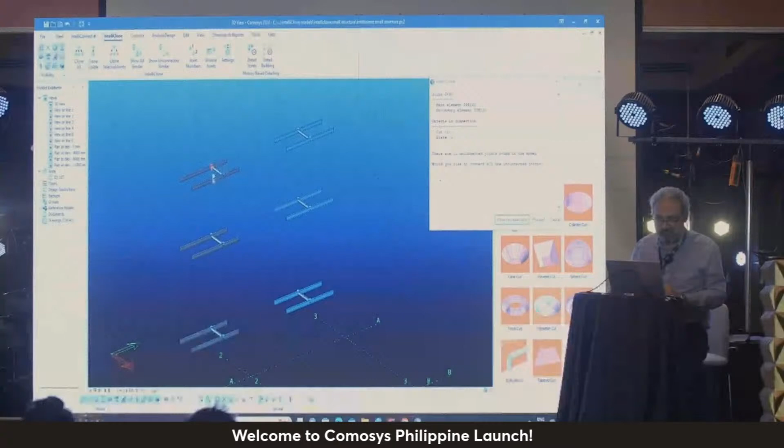It shows me those situations in the model, right? So this is the one I have connected, there's the other side obviously, then this side, this side, this side, this side, this side - all those ones you see on the screen. 10 from these and 1 left from my own set over there. What do I do now? I just say proceed.

Okay, now what is that? What has it done? It has done exactly what I wanted it to do.

I want you to appreciate the possibilities with this. You're not limited to any template, you're not limited to any style of detailing. Do whatever you want - if you're happy with that, the node will get multiplied. And this is very different.

I don't know if you're familiar with something called propagate joint - it's a command used by certain software. But propagate joint is very similar to auto connect. It does it on a one-by-one basis - it connects one, then the other, then the other, and doesn't offer you things like manual modifications. You have to limit yourself with the macro only. And then what do you get?

You get clashes. So these two technologies, they sound similar - like IntelliConnect sounds similar to AutoConnect, and IntelliClone sounds similar to propagate joints. But in reality, they're much deeper.

Now I want to talk a little bit about clean drawings - I think that's important for everyone, right? Everybody wants to see some drawings, and I want to show you two examples of drawings, and I think they're important because almost everyone asks me about the quality of the drawings. I want to show you the way they come out of the oven - the good, the bad, and the ugly - so that you know how much time you will spend cleaning them up.

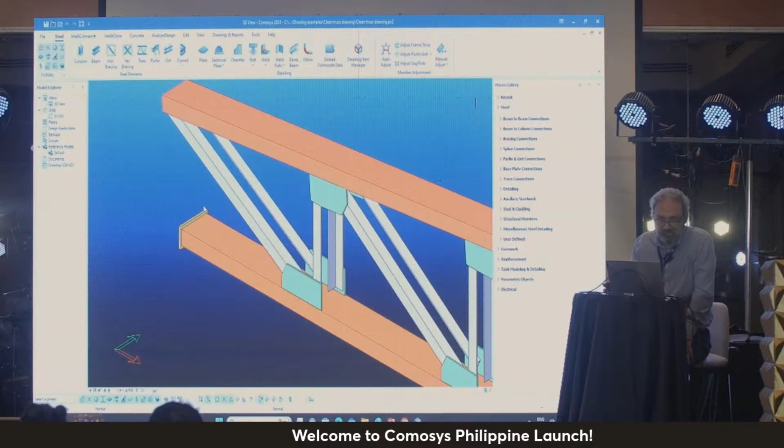So anyway, it's a truss, and I'm going to create the assembly drawing of this truss. The reason I'm creating the assembly drawing of the truss in particular is because I know that trusses are problematic - trusses are perhaps the most problematic in the sector. What do you do with the truss? You delete it - yeah, you delete all the dimensions and then you start from scratch. Isn't that what we all do? Yeah, let's accept it, right?

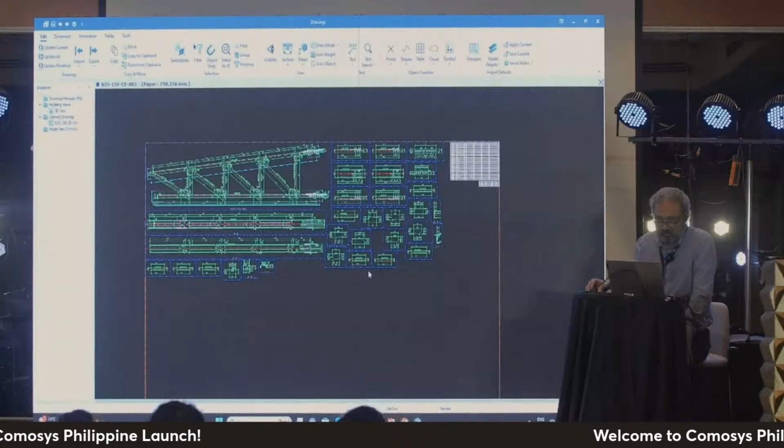So in COMOSYS, you won't delete it, hopefully - maybe you will add a few things, maybe you will modify a few things. But instead of talking about it, let me just select - all you do is create the drawing, say create the assembly drawing, and it creates the assembly drawing for me. It's finished - this is the assembly drawing. Let me open it. Now this is out of the oven, directly out of the oven, as it is, okay? So I'm going to zoom in a bit. It's not bad.

This is what I've been told repeatedly by our users, that the quality of drawings generally in COMOSYS is better. I'm confident about this because wherever I go, the number I get is something around 50-50, 50% time modeling, 50% drawing cleanup.

In my own experience, in our company, the ratio is 85-15 or 90-10. There is always cleanup, but as you can see on the screen, it doesn't look bad. Our experience, since we've been using this since 2008, which is 16 years, not 6 months, has told us that it's somewhere around 85-15. The drawing cleanup is a lot less than what we get with other software.

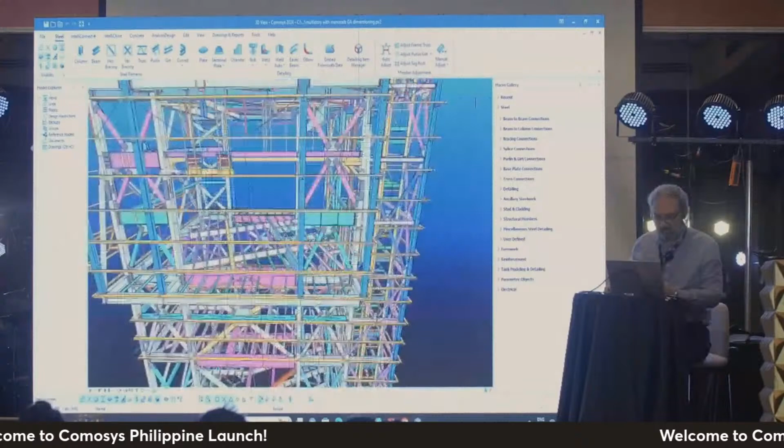I'm going to do one quick example. This is a multi-story building with all sorts of weird floor beams all over the place. I've got a GA setup to show you. Can you see the general arrangement drawing? It's a regular general arrangement drawing with lots of complicated beams going left, right, and center. But there's no dimensioning, if you notice. There are no dimensions, only the annotations have been created.

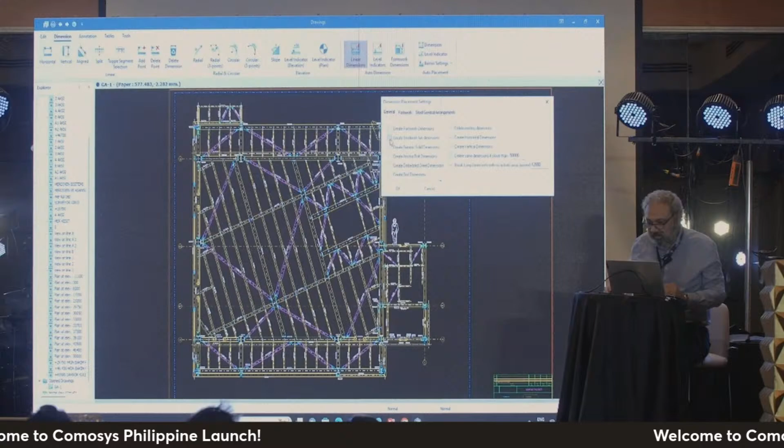Now, we've developed something called automatic dimensioning of GA drawings as well. Forgive me if I make a mistake, because I tend to not use these things very often. Let me see - I think create the steelwork GA dimensioning. Let me limit this to 25 or maybe even 20,000. So a few parameters - I can do the same for formwork dimensions, concrete as well, but I'm okay with this. So what do I do? I just select this viewport.

Select the viewport - this is the viewport. It has no dimension at the moment, just annotations, no dimensions. And what needs to be dimensioned? So the grid is going like that, but all these beams need to be dimensioned, right? All this little local thing over here needs to be dimensioned. So I'll just select this and press this linear dimensioning of GA drawings button.

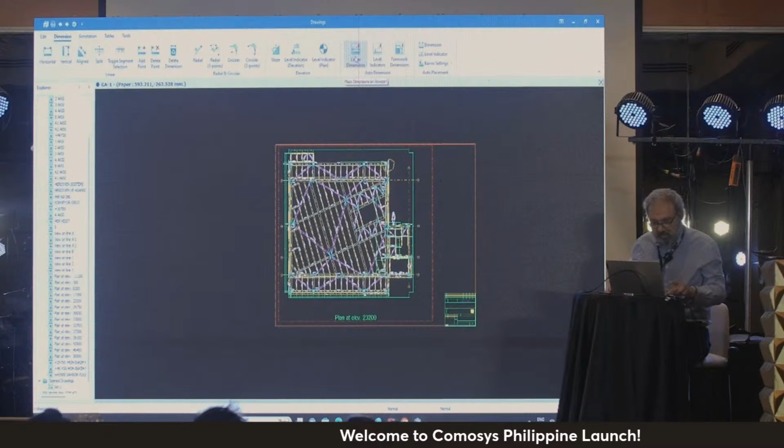That didn't work the way I wanted it to work. Let me reduce that to 15,000 and press it again. Yeah, that's better. So it's created all my dimensions, if you notice.

And even over here, this little offsetted platform, which is a bit irregular as compared to the other one, it's found all the working points. It's gone through - there are certain parameters you can play with, but we believe this also works with concrete, also works with steel, also works with formwork kind of situations. Basically it groups everything together, finds all the points which need to be dimensioned, groups them into subgroups. So for example, if there was something in between over here, it would find those points and dimension them as well.

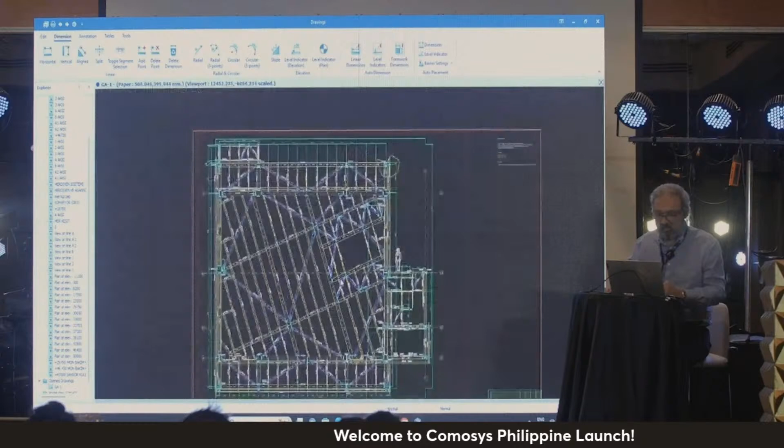So this is one thing I wanted to quickly go over. Now, what did I not show you? I didn't show you 95% of the stuff. I only focused on 2 or 3 of the technologies which are different. I didn't talk about auto adjust, for example - it's another revolutionary technology which will allow you to use your analysis model directly as your detailing model with maybe 10 minutes work or half an hour's work.

It's going to adjust everything according to the detailed model. I didn't talk about intelligent presets of macros - very, very interesting, very, very useful. I didn't talk about concrete, rebar at all, none of that. One thing I would like to show you is a few large models.